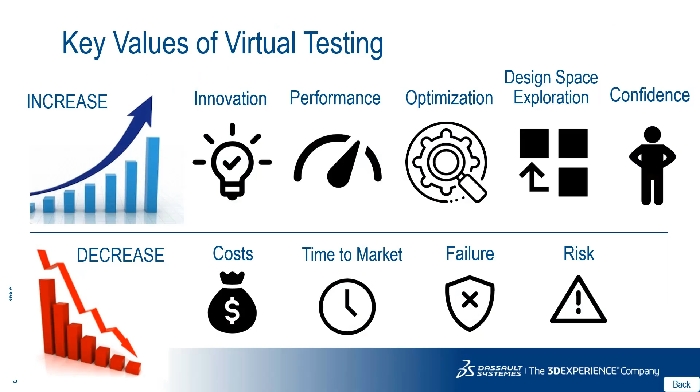So today, with respect to our simulation solutions from Dassault Systemes - Dassault Systemes has a dedicated simulation team which builds solutions across all physics, whether it's industrial equipment, aerospace defense, automotive industry, high-tech electronic devices, medical devices, or aerospace and defense, which we are going to talk about today. It has various solutions across different platforms to address all these challenges with respect to virtual testing and so on.

So let's first understand the myths and reality about simulation. When you talk about simulation, earlier there used to be a fear of investing in simulation because we always felt simulation is hard to use with complex equations to be solved. These are all myths I'm talking about with respect to simulation. We felt it was very expensive to invest in costly resources, both on manpower and infrastructure. We also thought it has only limited computer power and takes long design iterations, and so on.

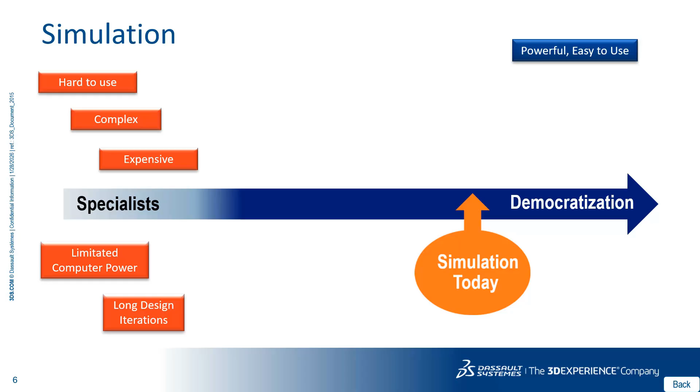But today, simulation is being democratized - that is the reality of simulation with the 3D experience we're providing. It has powerful solvers like Abaqus and CST Studio Suite, yet it is easy to use and handle by designers, analysts, and specialists. Its biggest advantage is 3D CAD integration - meaning there's no need to learn a new graphic user interface, or switch between windows for modeling and simulation. That is how simulation is very powerful today with the help of the 3D experience platform.

And quick design change - since this is a 3D CAD integration tool, any changes we make to our design at any point will be quickly updated in our simulation study. It is fast to run the simulation with cloud resources, cost effective because it can be scaled across different user levels.

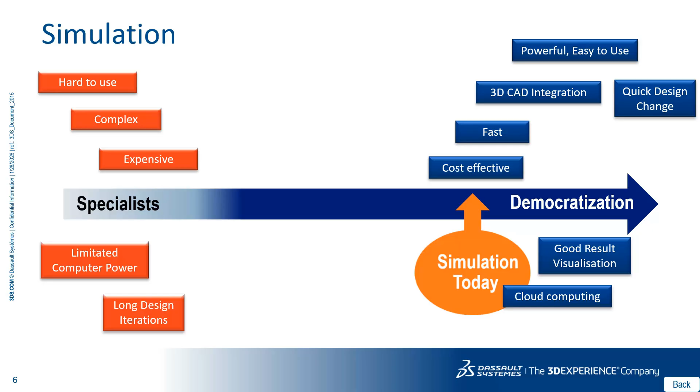And when it comes to post processing, good result visualization with the help of cloud applications and cloud computing means there is no need to worry about limited computer power. You can expand your running simulation using up to 144 cores or up to 256 cores. There is no limit. That is how Dassault Systèmes, with the help of the 3D Experience platform, democratizes simulation today, taking simulation into the future as part of the complete product design process.

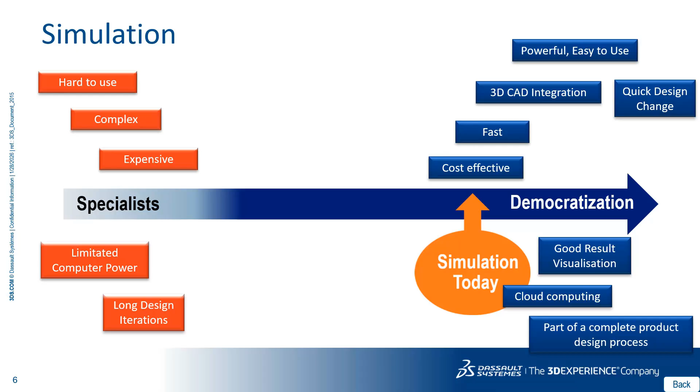So what drives product development? Whether it's aerospace defense or any product, the first thing is performance. How does it perform, keeping its key performance indicators in mind? How strong is it when I design any product, how will it sustain in the market, what kind of material and innovation is behind it, how lighter is my design, what is the quality aspect, how safe it is to use in different applications, what is the risk of this product release to the market, and price to cost.

This is always very important. Eco-friendliness, that is sustainability, is also very important. And how soon we release this product to market, time to market, manufacturability—whether it is additive manufacturing, injection molding, whatsoever—what kind of energy is consumed, how does it perform under different weather conditions like heating and cooling, what regulations it has to undergo before release, any kind of vibrations, how is it connected via smart devices, and if so, how efficient are those smart devices. All these things basically drive product development.

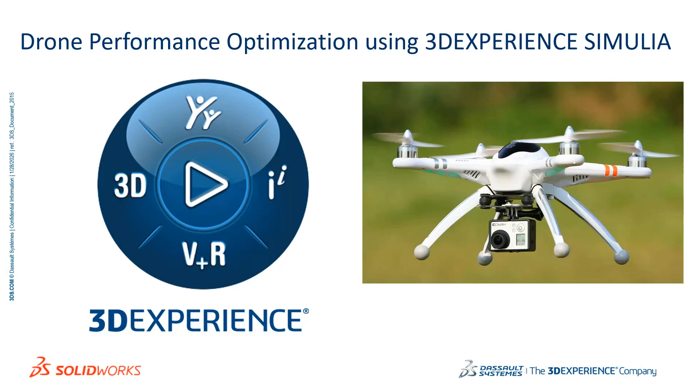So moving forward, keeping all these aspects in mind, today I am going to concentrate on the performance of a drone, which we help optimize using the Powerhouse 3D Experience SIMULIA applications.

When I say drone for aerospace and defense applications, the major challenges I may encounter are: what if it doesn't perform, and what if it is suddenly dropped, and how that creates an impact on the other sub-assemblies present in the drone. And what if the thermal parameters—because it has a lot of electronic devices—what if it doesn't have proper cooling methodologies? The third challenge is communication between the operator and the unmanned aerial vehicle, how effectively that communication is transferred. So structural strength, thermal performance, and connectivity are the major challenges for designing any kind of unmanned aerial vehicle or drone.

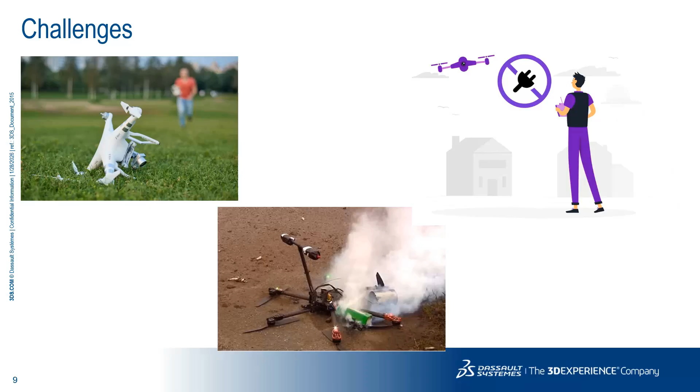So how do we address these challenges? By making use of the 3D Experience SIMULIA application. Let me first take an example of structural analysis, the strength analysis.

The factors to be considered for the drone design are structural strength analysis for various structural loads—for example, static load, dynamic loads, linear loads, non-linear loads, and drop impact during a certain unintentional event. Since it has a lot of motors, how does it perform under vibrational cases? What is its durability? What kind of materials should we use?

And then comes aerodynamics—the aerodynamic performance on flight characteristics—and the regulation tests, the electromagnetic compliance. These are all major challenges we can address by making use of 3D Experience simulation solutions.

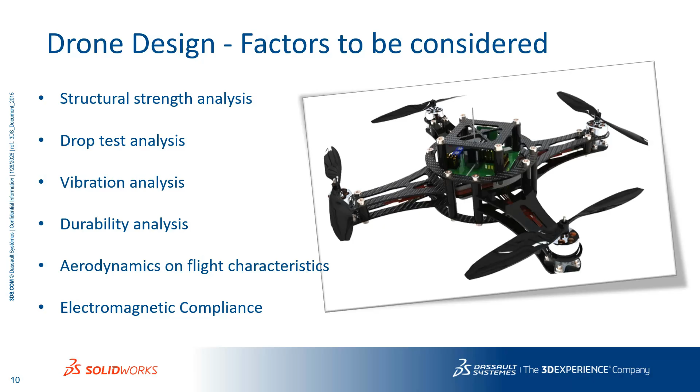So let's see one by one. Before that, how does 3D Experience work differently compared to standalone simulation solutions? The first point is integration, meaning simulation-driven design—whatever simulation we do, whether structural, thermal, or electromagnetic simulation, it is always integrated with the 3D modeling. That means any changes we make to SolidWorks will be directly updated in all the respective simulation studies. That is the meaning of integration and being designer-centric.

These tools are very easy to use. Any designer working on SolidWorks will be able to learn them very fast and work efficiently. And 3D Experience has comprehensive simulation physics—all advanced capabilities can be solved, even multiphysics like coupled physics domains, such as fluid structure interaction or thermal structural interaction. All these capabilities are there. Another biggest advantage of 3D Experience simulation is the cloud solving functionality.

So you need not have to depend on the local resources. You can directly run the analysis by making use of the cloud resources, which basically helps to reduce the infrastructure investment on IT.

It's scalable across all the user levels, like structural user, from basic to designer to analyst, and from there to expert. It can be scaled across all the user levels. That is the biggest advantage we are going to get.

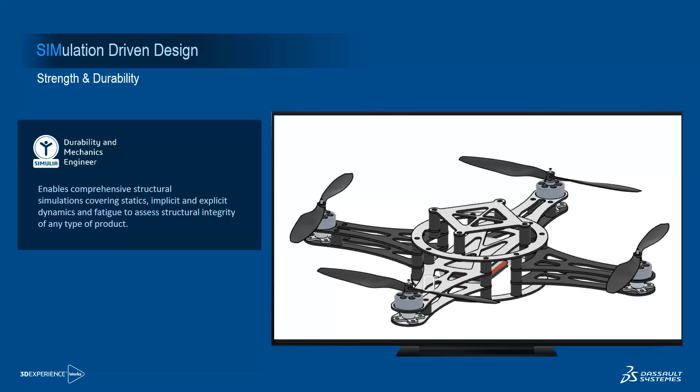So with that, let me take you through the structural capabilities here, the strength and durability. On the 3D experience, the solution we have is called durability and mechanics engineer role on the platform. You need not worry about the name, but it basically enables comprehensive structural simulation covering static, implicit and explicit, dynamic, fatigue functionalities. Structural integrity of all kinds of products can be calculated here.

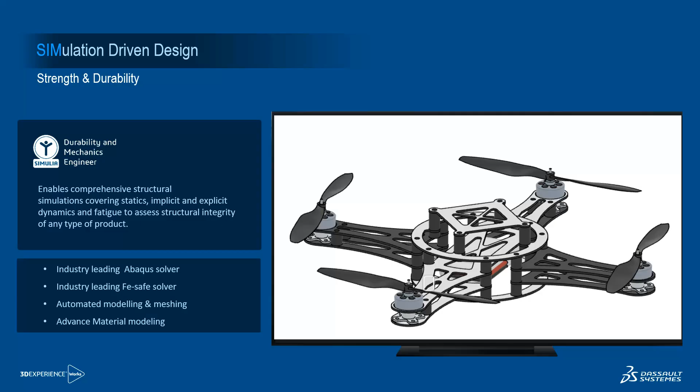The key things for this particular durability and mechanics engineer role is basically the industry leading Abaqus solver. It has FE-safe solver for durability analysis for both low cycle and high cycle fatigue, and automatic modeling and meshing, and comprehensive material modeling capabilities are a part of this particular role.

So what can be done by making use of this capability of durability and mechanics engineer role? It basically checks the stresses and deformation under static conditions to avoid failure before even producing a single prototype. And you can basically decrease the over dimensioning, meaning you need not over design it. It basically helps you optimize your design.

Mechanical resistance on the parts and assemblies basically calculates the factor of safety, and basically helps you choose the best design and enhance the product quality of the drones.

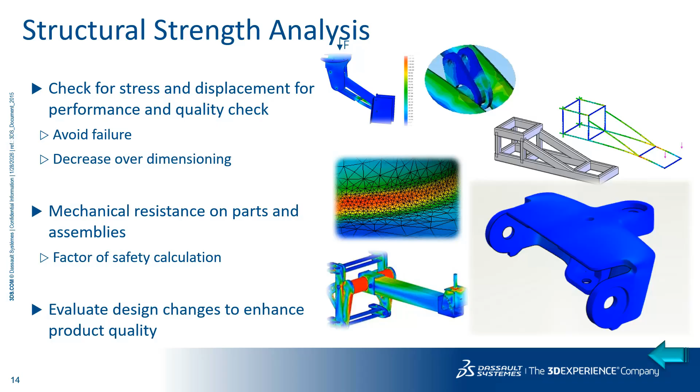So here are the few results on the structural strength analysis that has been done on the drone frame. On the left side, you will be able to see the stress plots done from the 3D experience structural solver, that is basically Abaqus. You can see how much the maximum stress it is undergoing, 25 megapascal. On the right side, you will see the deformation plot, which is showing 0.18 mm under the static loading conditions.

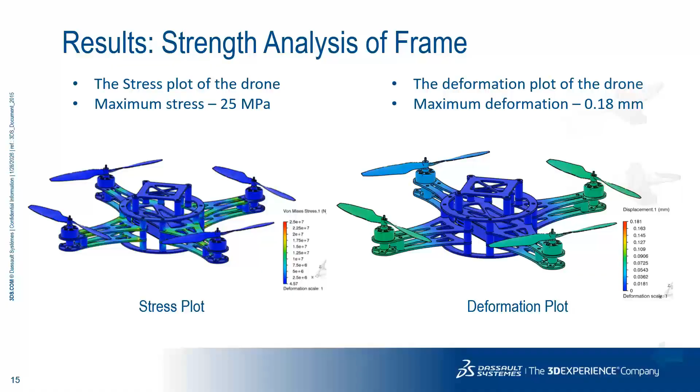So similarly, if I go forward, the next challenge which comes, as I told in the beginning, is vibrations. So before doing any kind of vibration analysis, first we need to understand the natural frequency of the drones. That is basically the modal analysis.

So 3D experience simulation solution has a capability for you to do free vibration, forced vibration for any kind of application, especially for aerospace and defense applications. So all these vibration analyses with respect to military standards and so many other standards are very important. Here, it provides the capability for you to calculate the eigenvalues.

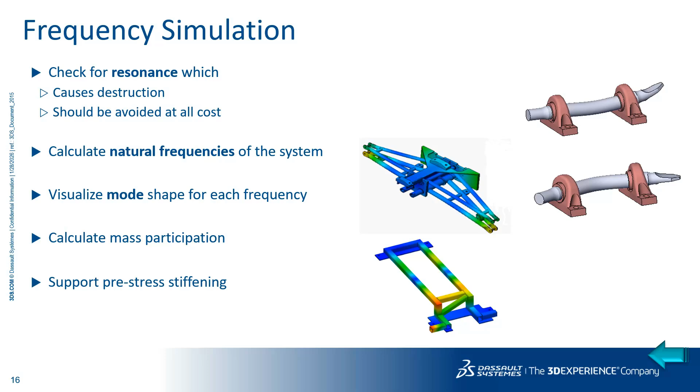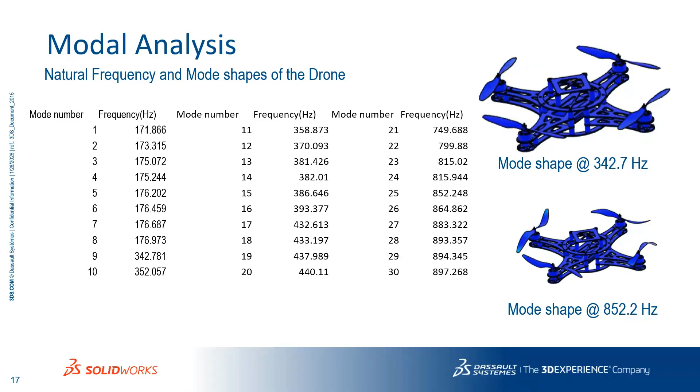So here you can see I have extracted the first 30 modes ranging from 171 hertz to 897 hertz, and you will be able to see the different mode shapes on the right hand side. The mode shape at 342 hertz is being shown here, and the mode shape at 852 hertz is also being shown here. So this is how the visualization is available inside SolidWorks, inside the 3D experience simulation applications.

So now what about, we've seen the free vibration, but what about the forced vibration? It might experience harmonic vibration, it might experience random vibrations with respect to military standard, shock vibrations, and so on.

So if I have to keep our structure safe under the influence of these kinds of vibrations, we have to keep these peaks as minimum as possible. That is how this SIMULIA application gives an indication to the user to make any changes, design modification, and optimization before even producing a single prototype while they build the 3D model.

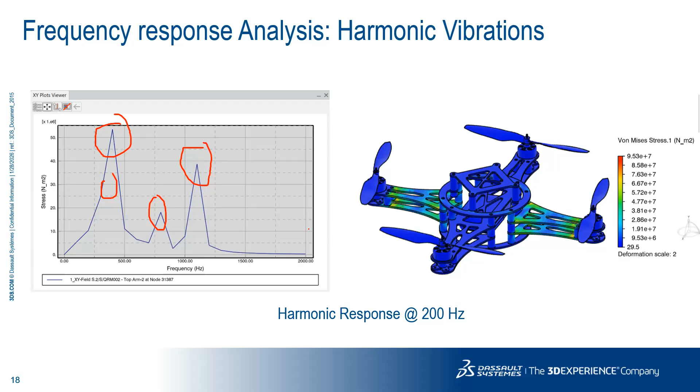So moving forward on the drop impact, we have an explicit solver with the help of Abaqus here. Abaqus has both implicit and explicit solvers, especially for high-speed events like crash test, drop test, the package drop test, and so on.

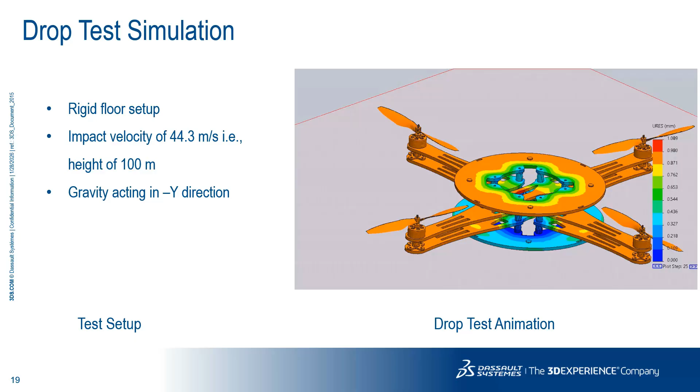So we have an exclusive Abaqus explicit solver for doing this kind of impact and drop simulation. This is an example of the drop test being done on the particular drone. Moving forward, those are all basically on static analysis, vibration, impact, and similarly a lot of things can be done. But what about the durability?

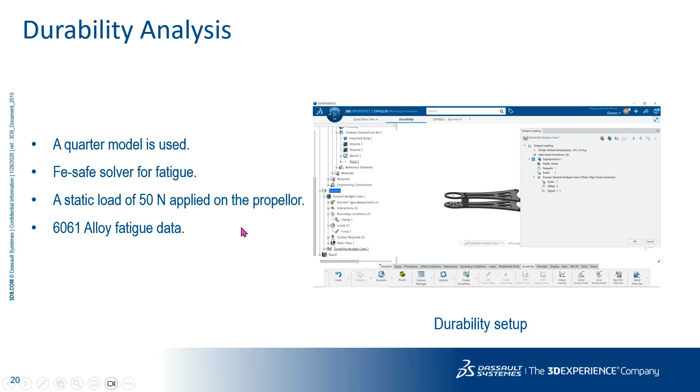So we have an industry-leading FE-Safe as a durability solver. To explain the capabilities, I've taken the quarter model of this particular drone, using the FE-Safe solver, and the static load I'm applying onto this structure is 50 Newton. For a reference, I've taken a material that is basically the 6061 alloy for the fatigue data. Once we do the fatigue analysis, FE-Safe supports both high cycle and low cycle fatigue analysis, and it considers both strain-life curve and stress-life curve to determine the life of this frame in terms of basic repeats.

But the minimum repeats obtained is 3.95, meaning if you have to get the value of this, it's 10 raised to 4 as the total life of this. Similarly, after that particular life, the damage that got initiated can be calculated on the durability solver.

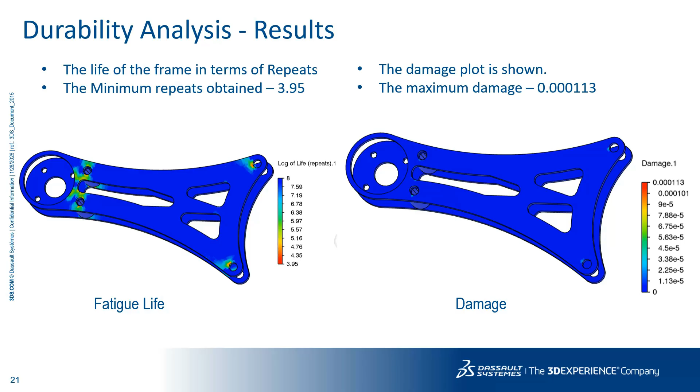So it is not just limited to metals. You can do durability analysis for various other materials too, like rubber material with the FE-Safe rubber solver, or composite materials with different theories of failure. So there are no limitations, and that's the key advantage of using both Abaqus and FE-Safe solver.

So I was talking about composite materials. Basically, a lot of research is being done in all aerospace and defense applications to use composite material because its strength-to-weight ratio is very high compared to conventional materials.

So how do we model this? The analysis of composite material is not as isotropic as other materials. Abaqus gives you flexibility in terms of defining the layer-wise definition. Here I've taken an example of carbon fiber, modeled using engineering constants, meaning the Young's modulus in all three directions - x, y, and z - will have different values, and similarly the Poisson's ratio and the bulk modulus.

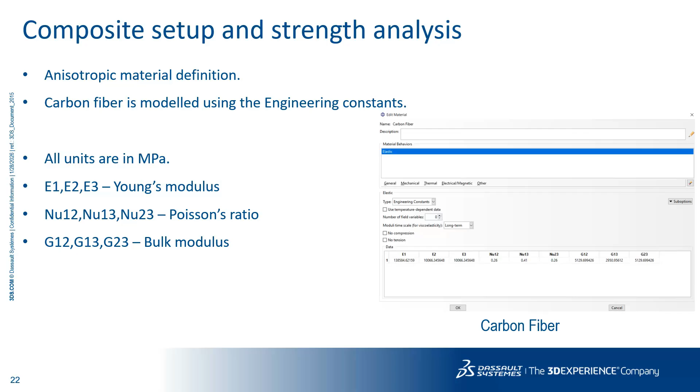So the first layer is made up of carbon fiber, and all three layers are made up of carbon layer with an element thickness of 0.5 mm and a different coordinate system. The orientation is very important: the first layer has 0-degree orientation, then 30-degree variant, and -30 degree - similar to how it's done in practical conditions for composites.

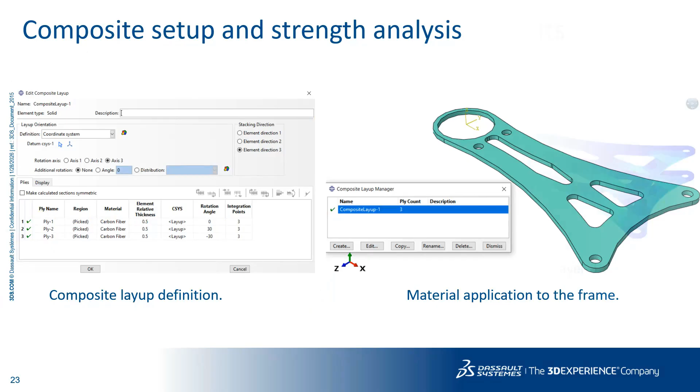In a similar fashion, we can define this to simulate as realistic conditions as possible. Once we do that analysis, you have excellent post-processing for composite materials to visualize stresses, deformation, factor of safety, and so many other variations across all the layers. Here I've plotted the stresses for layer 1, layer 3, and similarly for n number of layers.

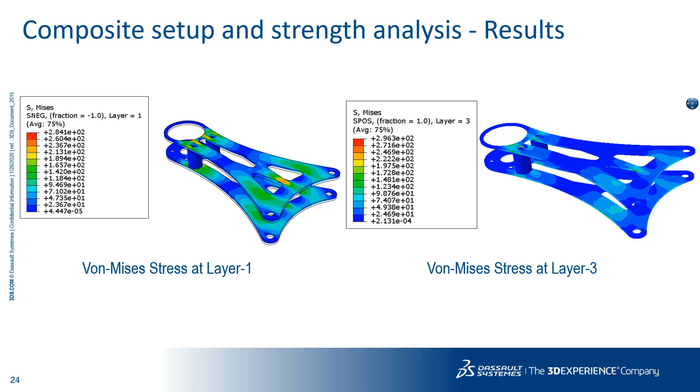If you take any big aircraft wing, it will have multiple layers - even extending to 30, 40, 50 layers. So there is no limitation to define the layers here inside Abaqus. That is the point I'm trying to make.

So those were the capabilities with respect to structural performance calculation. Next is with respect to aerodynamic and calculating the flight characteristics. Here again, in the same graphic user interface of 3DEXPERIENCE simulation, we have an excellent fluid dynamics solver with the help of SIMULIA. They have built a very excellent solver for you to do both internal and external simulation analysis.

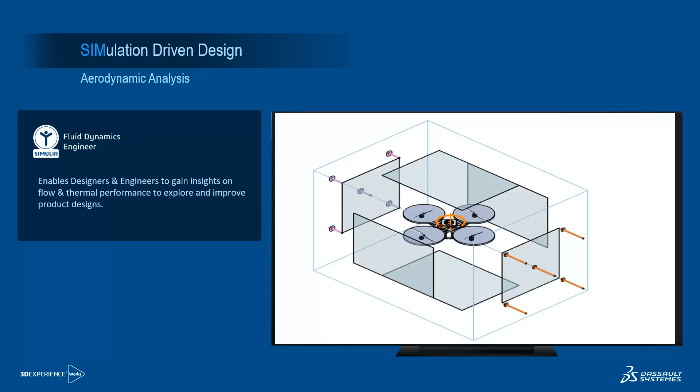In this particular aerodynamic analysis, which basically enables designers and engineers to gain insight about flow and thermal performance to improve the product designs, the key benefits remain the same. They are design centric, with automatic meshing - the meshing is very easy to generate. Automatic generation of fluid volume, body-fitted meshing, boundary layer - everything happens in a very easy and automatic manner.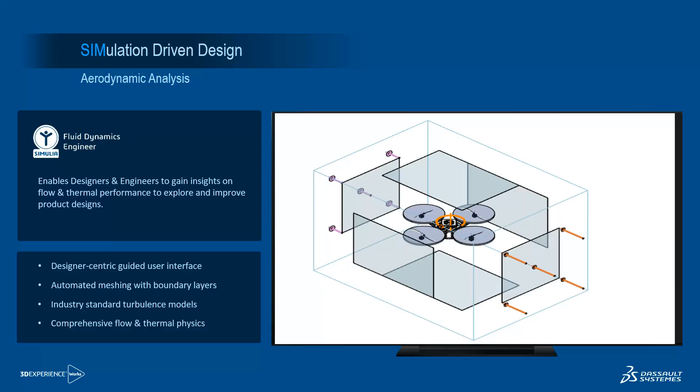As far as turbulence models are concerned, especially when doing aerodynamic analysis, the important turbulence models on top of the realizable K-epsilon model, like the K-omega model, SST, Spalart-Allmaras, are always available. It also has comprehensive flow and thermal physics that can be accurately predicted.

Here to take an example of aerodynamic analysis, you can see how we understand aerodynamic forces like lift force and drag force with respect to different angles of attack. I have considered an angle of attack from 0 degree to 5 degree. The set velocity is 25 meters per second, the wind velocity considered here. The pressure around the drone is set to atmospheric for simulating the virtual wind tunnel test.

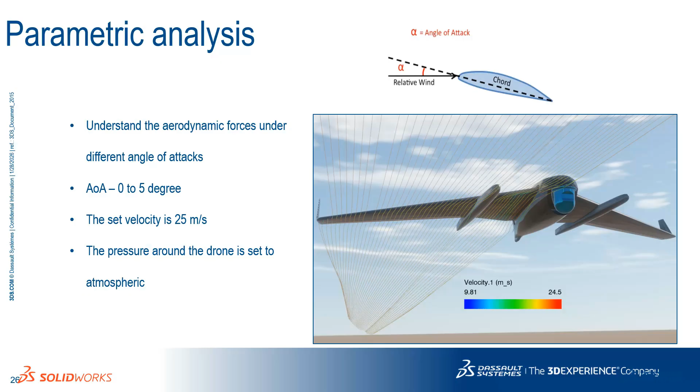When we do the parametric optimization or design of experiments, the first one basically gives the distribution of pressure on the complete surface of the drone or unmanned aerial vehicle, the pressure plot at zero angle of attack, and the respective streamlines.

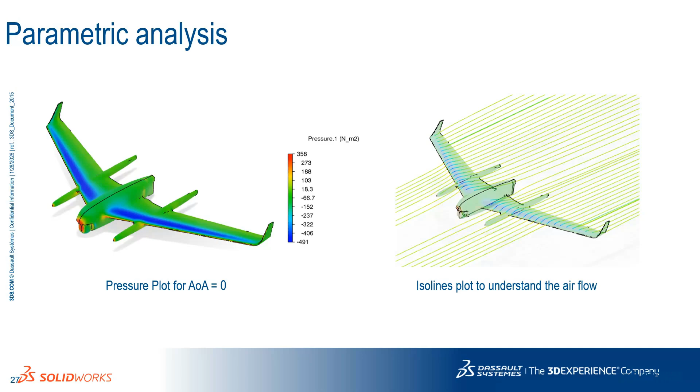What I'm trying to talk about here on result visualization, when we do any aerodynamic analysis, the different parameters - pressure distribution, velocity distribution, if any thermal things are there the temperature distribution, or the different turbulence parameters, the lift force, drag force - anything with respect to aerodynamic characteristics can be calculated with the help of these excellent post-processing parameters.

Moving forward, I'm comparing two different angles of attack. On the left side you can see the 5-degree angle of attack, the pressure distribution and how it is changing with respect to 0 degree to 5 degree, and similarly the net normal force and net axial force acting at 0 degree angle of attack or 5 degree angle of attack.

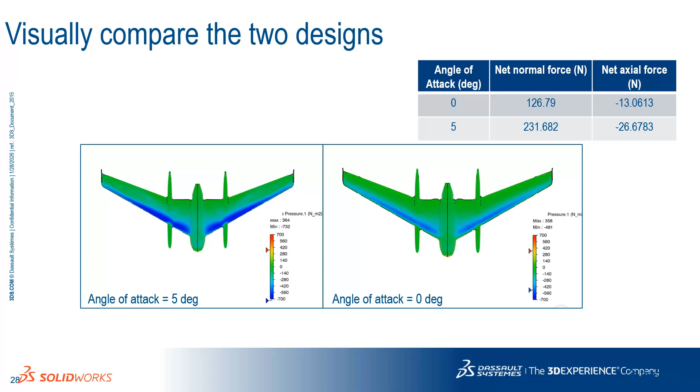All these important parameters, how do we do it in our experimental case study by making use of a wind tunnel? This FMK, or the fluid dynamics solver on the 3DEXPERIENCE platform, basically helps to capture cases as realistic as possible. That is how the fluid dynamics solver is unique in nature to do the aerodynamic simulation of these drones.

Here is a quick post-processing related thing. On the first one you can see the lift coefficient versus angle of attack. As the angle of attack increases, how it is influencing the lift coefficient, drag coefficient, or the lift by drag - these are all important flight characteristics with respect to any aerodynamic application at different angles of attack. So those things can be calculated here.

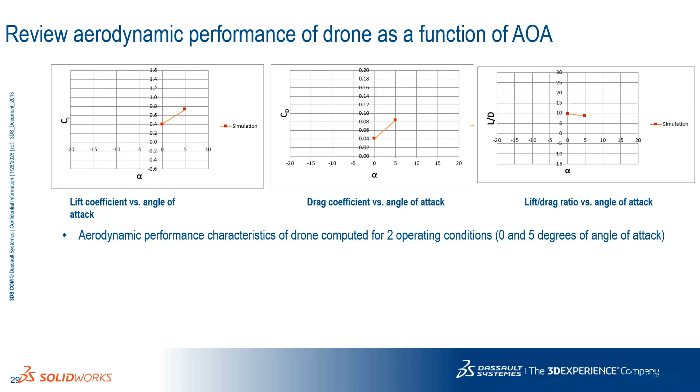That's the key point I was trying to make - the turbulence models, the industry standard things, basically help capture things as realistic as possible. Here the cruise aerodynamic characteristics - on the top side you can see the wind tunnel test, done using the experimental wind tunnel test, and on the graph you will see the wind tunnel data compared with 3DEXPERIENCE CFD, how closely it matches. That is how these tools have been validated before release.

That is what I meant about different angles of attack with respect to different drag coefficient and lift coefficient, and how accurately you'll be able to match it with respect to experimental test data.

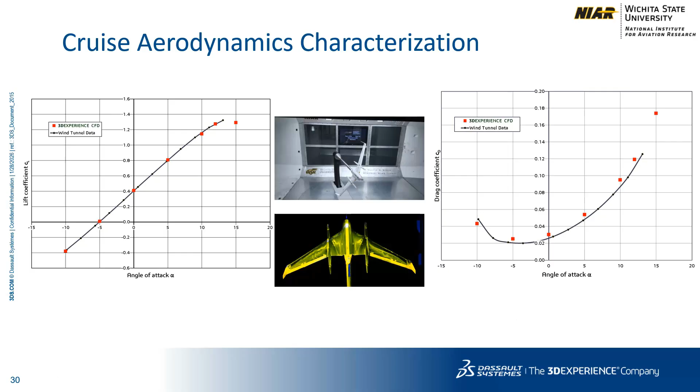Moving forward, we have different fluid solvers with us. One is on the SolidWorks platform, called SolidWorks Flow Simulation. For Aerospace Defense applications, calculation of lift force, drag force, L by D ratio, and the performance of any drones with respect to rotating domain and different meshing techniques - the immersed boundary technique, automatic adaptive meshing, and other things - can be done with both SolidWorks Flow Simulation and 3DEXPERIENCE.

SolidWorks Flow Simulation is good up to a Mach number of 0.3, and anything beyond 0.3 we have 3DEXPERIENCE SIMULIA, from the Abaqus solver, with the help of all the advanced turbulence models. Even for doing this kind of analysis it is very effective. That is the point I'm trying to make here.

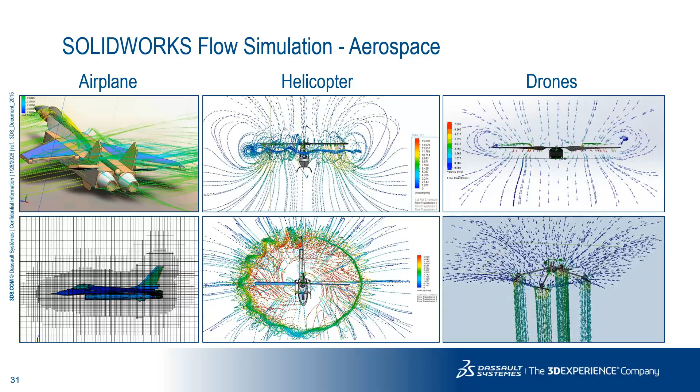So that is on what I call the aerodynamic part of it.

So we have started with three major challenges. One is the structural challenge, which we addressed using the Structural Abaqus solver. The second was aerodynamics, which we covered with the 3DEXPERIENCE CFD application. The third is about communication for these drones when operated - it will have different electronics, different antennas on the remote, and a transmitter and receiver on the controller to communicate. The performance of that under electromagnetics is also very essential.

So on the 3D Experience platform, to address this challenge, we have one of the industry leading electromagnetics solvers. The name of the solver is CST Studio Suite, for doing electromagnetic simulation from low frequency to high frequency applications - especially motors, transformers, generators - and taking those capabilities forward to high frequency applications like RF microwave, antenna performance, printed circuit boards, power integrity test, signal integrity test, and the regulations and compliance tests for electromagnetic compatibility and interference, the EMI/EMC simulation. It has capability for all aerospace and defense applications.

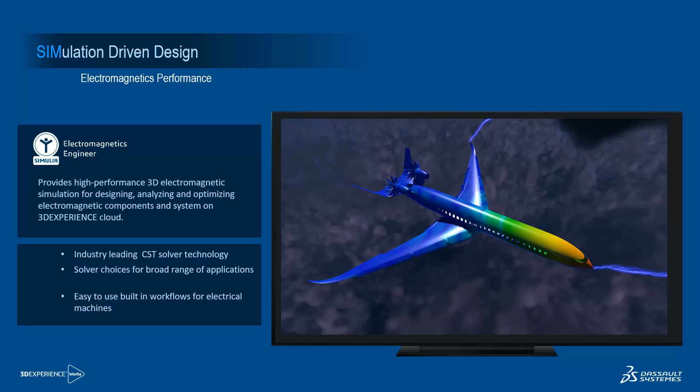And again, it is very easy to use for electrical and electronic applications. So here, if I talk about electromagnetics simulation with respect to aerospace and defense applications, I just listed a few important applications, like lightning study.

How lightning occurs, and how we place the respective components to study this effect. RF interference checking can be done. EMI/EMC compliance testing, which is mandated for electronic devices in aerospace, so it helps address all those EMI/EMC challenges.

And for communication, especially for the drone we're talking about, the antenna is where a lot of communication happens, and choosing the right location to place it is very important. Various efficiency parameters can be measured with respect to antenna placement, and this helps choose the best place for effective performance.

Another key advantage of this electromagnetic simulation is it can directly read the 3D model from SolidWorks, and it also reads electronics data like ECAD data, or directly from native file formats like ODB++ - printed circuit board information with all the layer information and vias information - directly inside the electromagnetics engineer role for doing any kind of electromagnetic simulation.

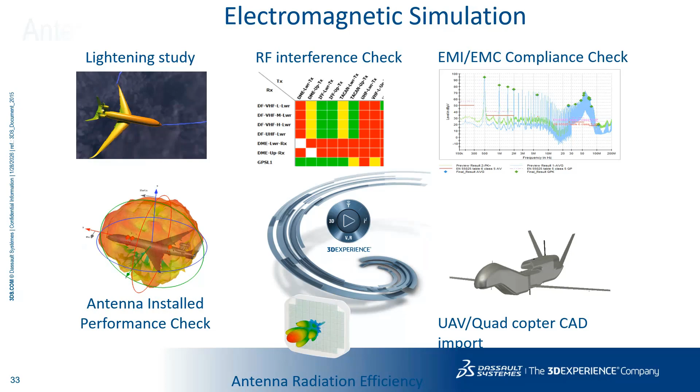So here, the different performance when you test the antenna standalone without installing it on the final drone - the standalone performance with respect to different S-parameters or different antenna performances can be seen here. And what is the performance change when it's installed on the real drone, in one case.

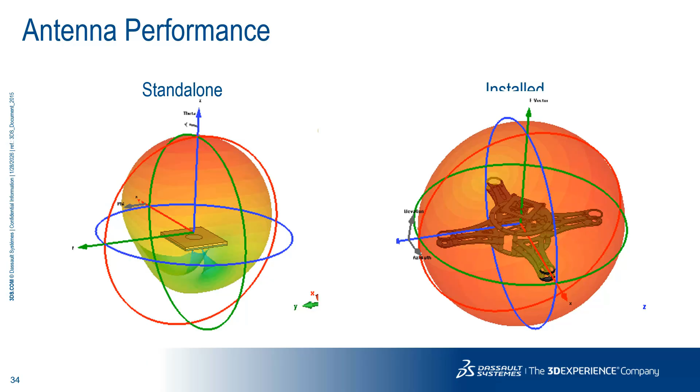And again, as I mentioned, if it's placed in different orientations, how effectively it's able to receive the signals for efficient operation and efficient communication between the operator, the remote, and the receiver and transmitter - that kind of important analysis can be done with respect to different materials and different placements of the antenna.

So here is one of the important outputs - the E field at different frequencies, like 2.4 gigahertz, and how the E field varies. Different E fields can be simulated at different frequencies, and you'll be able to see whether it's meeting your end goal, or if modifications need to be made to the antenna design or its placement. All these important parameters can be studied well at the design stage, even before making a combined conclusion with the mechanical, thermal, or aerodynamic engineer.

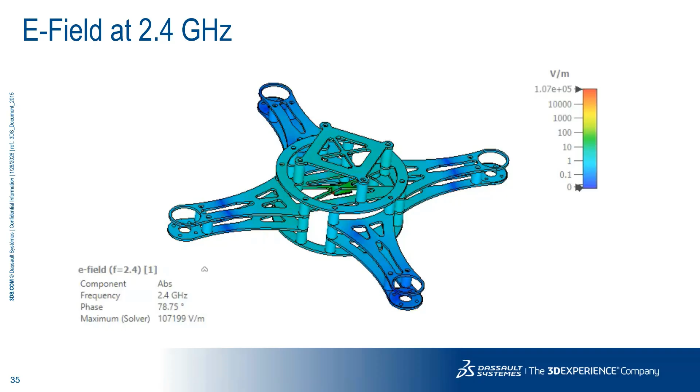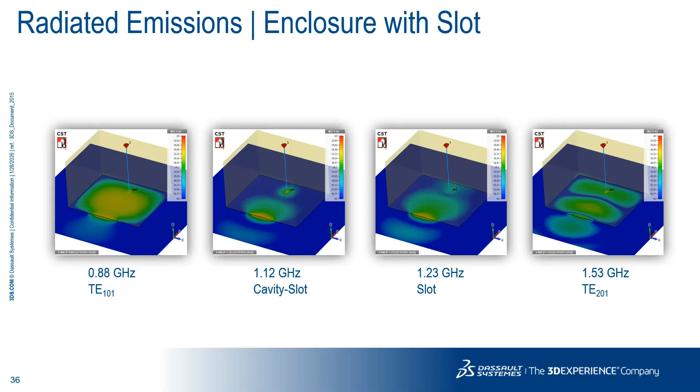That gives you an idea. On top of that, the radiated emissions with respect to enclosure with slot and without slot are important studies. If you have ever come across real radiated emissions, you will see how accurately and beautifully it captures different contours with respect to different frequencies. You can see the 0.88 gigahertz, 1.12 gigahertz cavity slot, and only the slot, with respect to different parameters.

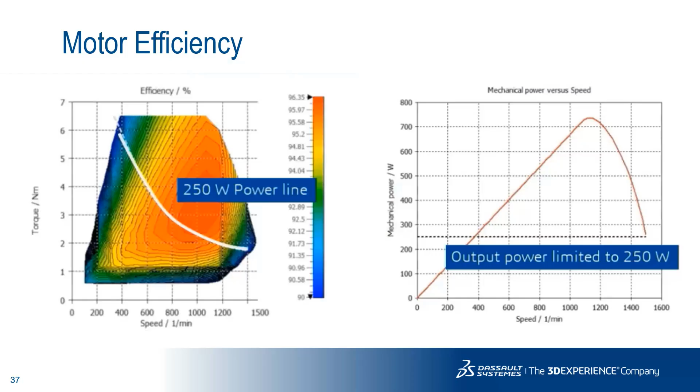This is again on the motors. Let's say for the quadcopter you are using the motor, and if you're designing it, how efficiently it is working. If I give this much power, what kind of electrical output is it producing, what kind of mechanical power with respect to different speed, and what kind of electromagnetic field it is undergoing. All these important parameters, even at low frequency, are possible within the electromagnetic solver on the 3DEXPERIENCE platform. That covers the complete technical aspects of structural strength, aerodynamic flight characteristics, and electromagnetic compliance.

Another important thing about 3DEXPERIENCE is the cloud computing, which I briefed in the beginning. What is this basically? 3DEXPERIENCE connects your simulation data directly to the cloud. If you don't have enough RAM for large models, and if analysis is taking too long for complex runs, or if you have to run multiple analyses at the same time, 3DEXPERIENCE has the answer for all these questions, wherein you can directly take your data to the cloud for running simulation. It doesn't matter - we have a unified token system wherein these tokens can be used to run structural simulation, durability simulation, thermal simulation, and electromagnetic simulation. That is the power of the 3DEXPERIENCE unified licensing model.

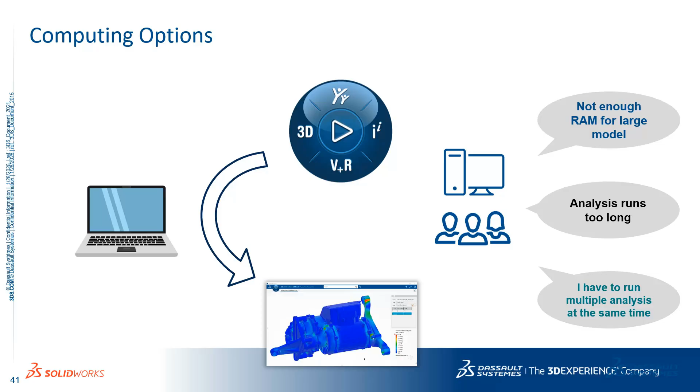You must be having certain challenges. When you go for on-premises HPC, we know only the known cost - hardware is very expensive, but it also has a lot of hidden cost associated with it that we always overlook. The known cost is basically the tip of the iceberg, whereas the hidden cost - outages, UPS, power cooling, maintenance, security, and so many other things - if you invest in physical hardware, after 3 years people call it outdated and you have to undergo complete replacement.

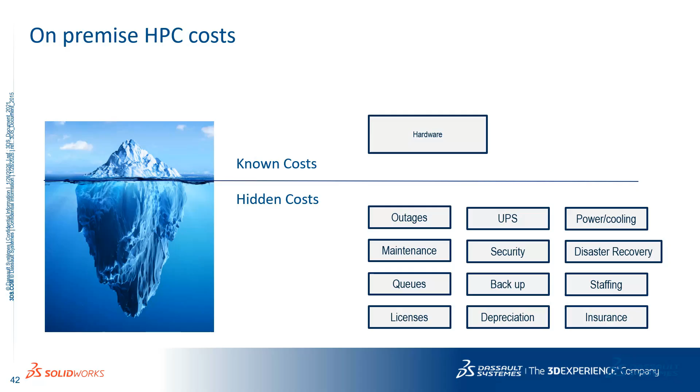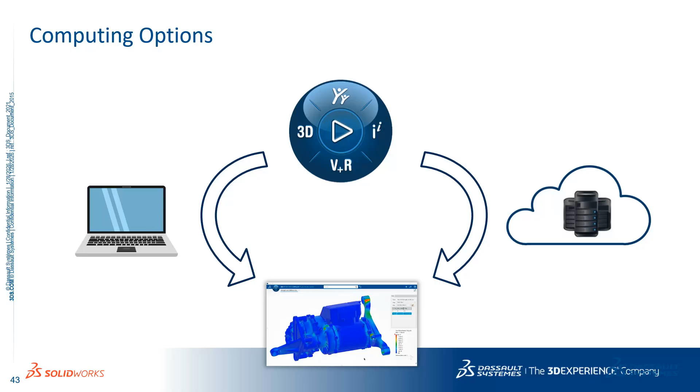It is way expensive. That is when people choose cloud, wherein you can directly submit your data on demand to the cloud, which is available at any point in time. If you want to run analysis today using 36 cores, or 48 cores, 72 cores, 144 cores, 256 cores, there is no need for you to invest in hardware. All you need to do is buy respective tokens or credits, and submit this analysis to get it done using cloud resources. The beauty of computing on cloud is they are available on demand 24/7 - high performance computing cloud instances with the latest generation CPUs, up to 144 true cores per analysis, and even 256 for different analyses, with distributed computing, low latency networking, high performance, and scalable storage.

So even if you submit the analysis, you don't need to keep your workstation open. In the backend, it will use cloud resources and run the respective analysis. That is the beauty of cloud computing and the 3DEXPERIENCE platform.

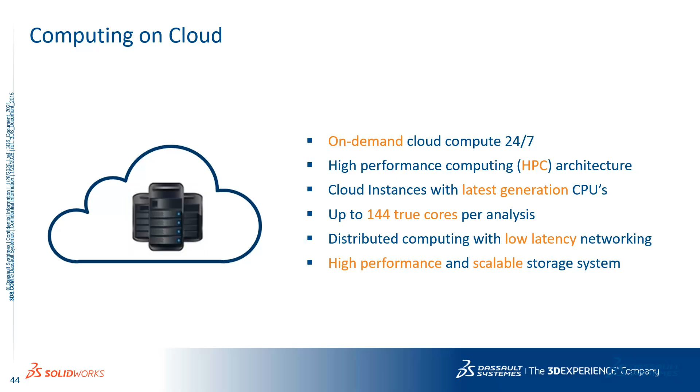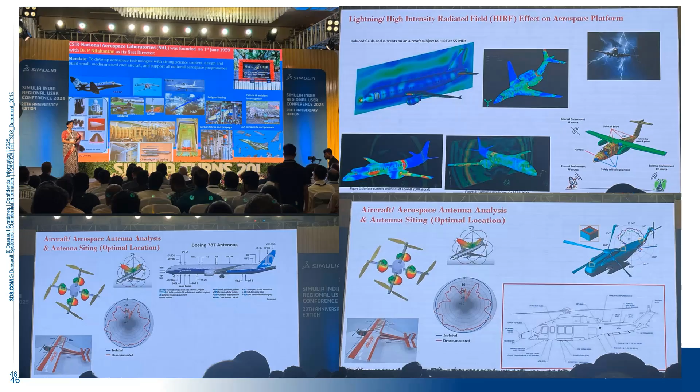I'd like to conclude this section of the webinar with a few customer references where we have successfully made a transaction and customers are successfully using our tools in different aspects. Here is an example where the National Aerospace Laboratories have invested in both Abaqus and CST Studio Suite, and they presented at one of our biggest regional user meets conducted last year, showing how they used CST Studio Suite in different applications - lightning, high intensity radiated field, and so on. They use CST Studio Suite for various applications, and they are one of our largest customers for CST Studio and Abaqus solvers.

Similarly, Range Aero are Abaqus users for their drones, and they were able to shorten development time by 40%, decrease development cost by 30%, and cut down prototyping, all by using only the Abaqus solver.

So, here is one more case study, the Aerial eVTOL Vehicles Private Limited. They were one of our fluid dynamics engineer customers, along with SolidWorks, for calculating the flow performance of their aerial vehicles.

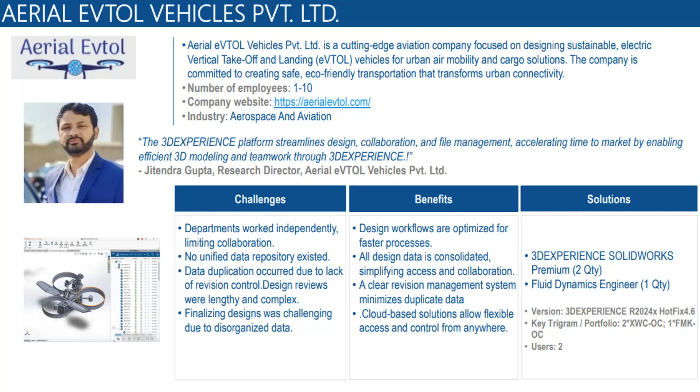And Ikron Aerospace, again, it is a startup company, but they were able to get a lot of benefits from 3DEXPERIENCE, not only on the technical side but also on the commercial part of it, or on the support part or the training part, and they were very much happy to use it for testing and validating the different performance of their aerospace applications.

So this is the key, basically. Investing in these tools and deploying them very early in the design stage basically helps you realize your return on investment. That is how all these customer success stories are talking about.